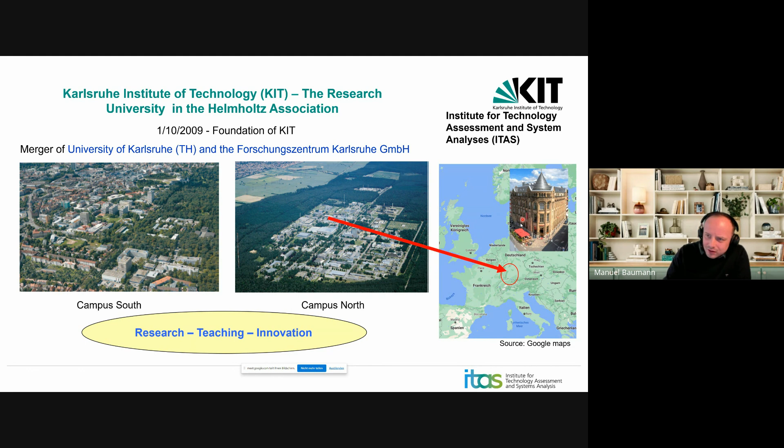I suppose not everybody knows where Karlsruhe is. So here you have Germany, and it's located in the very southwest of Germany. And this is our institute, the ITAS, in the center. So the KIT has several topics where they work on. The ones in bold are those which are the most relevant ones for us, at least in our group: climate and environment, energy, materials, mobility systems, humans, and technology.

Just to give you some numbers from 2022, KIT has about 9,700 employees, of which I would say about half are really researchers, and the rest is technicians and everything you need to keep research alive in an operative way. We have about 21,000 students, about 400 professors, and a budget of 970 million euros.

So let's jump into ITAS. We are part of KIT. Here you see the team in the center, and the building in the back is our institute. It's an old bank building in the center of Karlsruhe.

So also here, to give you a brief overview, we have a budget of about 9 million euros per year, with a third-party funding ratio of about 50%, and 37 projects ongoing. The employee number is not correct anymore—we have about, I would say, 150 employees in our institute at the moment, with about 30 PhDs. And we have researchers from all around the globe.

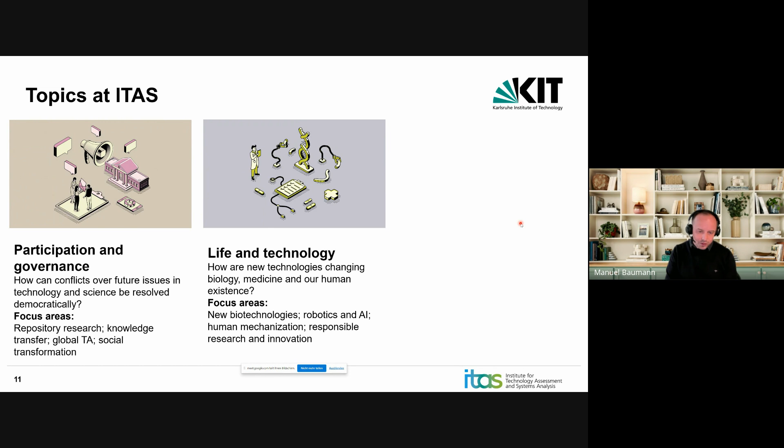And finally, we have visions and ethics. How do expectations of the future and ethical considerations shape science, technology, and politics? Here we have projects on vision assessment, global ethics, and technology and innovation.

So who are the ITAS addressees? Because we said that we try to provide knowledge for action. It's, for example, the German Bundestag, that's the parliament in Germany, where we have the Office of Technology Assessment at the German Bundestag, the so-called TAB.

Then we provide action knowledge to the European Parliament, the federal ministries that we have in Germany, the European Commission via third-party funding, other federal authorities which we try to consult, and state ministries of Baden-Württemberg.

That is the state within Germany where we're located. Then, of course, we have cooperations with companies and other associations, and we also make use of the media and the public, where we interlink with the broader citizenship.

So at ITAS, we have local activities, national activities, as you see here, and then international projects where we link to other colleagues all around the globe. And as I have mentioned before, we have the Office of Technology Assessment at the German Bundestag - this is a unique link to policy making.

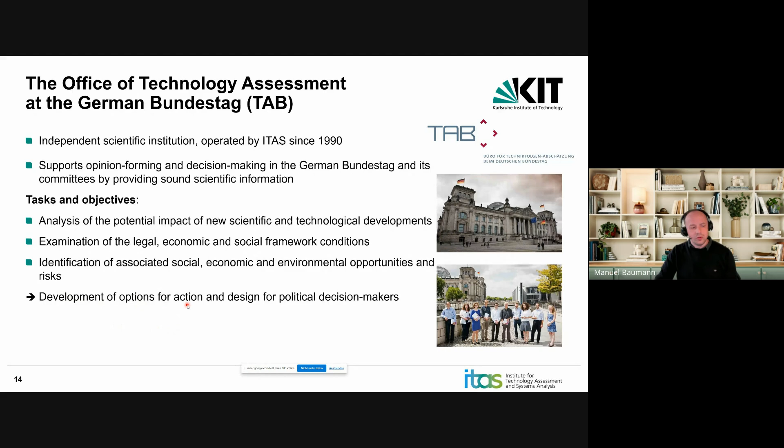The tasks and objectives are the analysis of the potential impact of new technologies, examination of legal, economic, and social framework conditions, and the identification of opportunities within these different dimensions. This shall serve as a base to carry out actions for political decision makers.

Here you see an overview. What are the tasks? Being a radar for new hot topics in technology development, showing the consequences, providing orientation, communicating science, stimulating a dialogue, and of course a networking aspect. You can just visit the website.

There are a lot of freely downloadable reports. You can see it's really very different, coming from genome editing, new space, etc. There are plenty of topics that are covered.

But now let's deep dive. What does research at ITAS look like? Here I will give you, in a nutshell, an overview on technology assessment and system analysis.

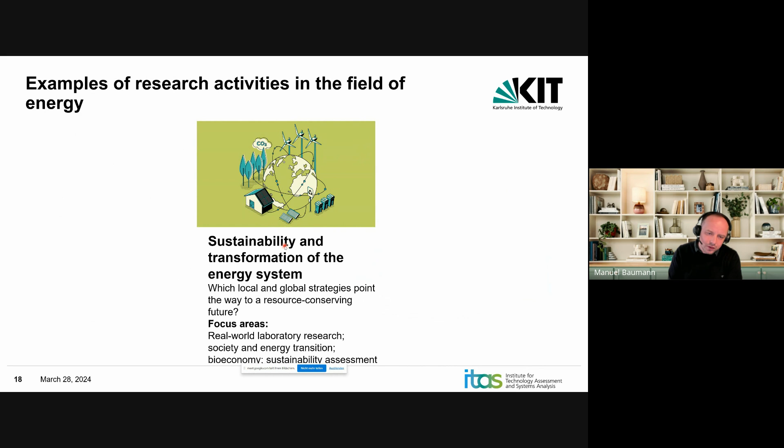As I've shown before, this is one of the areas we cover: sustainability and transformation of the energy system. Here we have several research groups, such as philosophy of technology, research for sustainable energy technologies, etc.

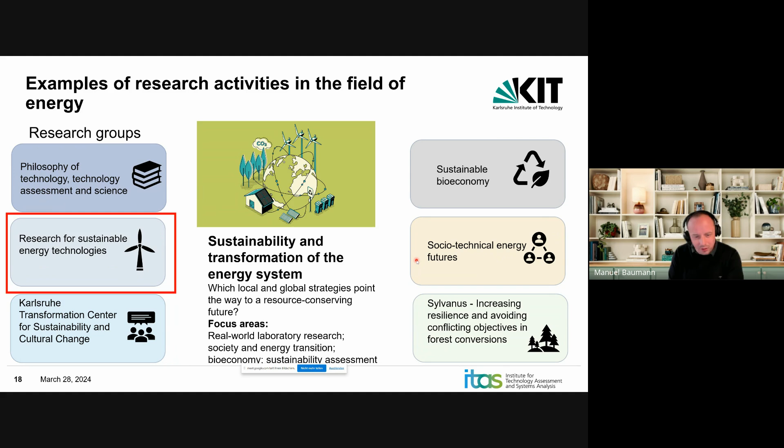I will primarily focus on the work conducted in the group RESET, Research for Sustainable Energy Technologies, because time is too short to provide you an overview of this multifaceted work being carried out at ITAS. So what is RESET?

Research for Sustainable Energy Technologies - this is the group. We are about 14 people, and what we do is conduct sustainability assessments on emerging technologies to support decision making.

Here we work with these fields. We do environmental assessments, life cycle assessments. We look at the economic dimension where we conduct methods like life cycle costing. Then we look at society where we have studies on technological acceptance, and we try to involve stakeholders as far as possible.

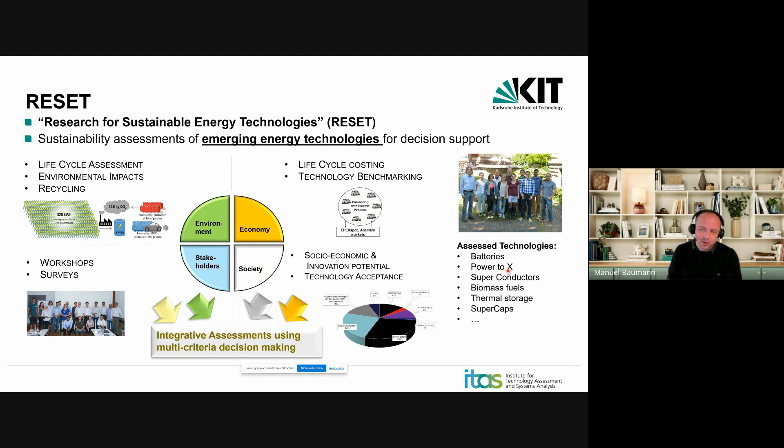Some technologies that we assess are batteries, power to X, biomass fuels, but today we're mainly going to speak about batteries. Having said that, why do we look at sustainability when it comes to batteries?

Of course, all of you know that we have issues: climate change, planetary limits, and for example the Sustainable Development Goals, which we try to fulfill.

There's some regulatory pressure for batteries and policy making in general in Europe, based on the European Green Deal. Then we have other developments like sustainable finance and taxonomy regulation. When it comes to batteries, we have an EU battery directive which really regulates, for example, the carbon footprint of batteries.

And it's always like the same question. We work in this field and try to improve our state of living, and there are always those that criticize that. But at the end, it's important to consider these topics.

In our assessments, we try to follow different concepts. For example, we have the integrative concept of sustainable development, which was developed here over 20 years at our institute. We try to follow the Sustainable Development Goals, and mainly due to operationalization issues, we use the triple bottom line model of sustainability.

As I said, we are looking at emerging technology. But what is emerging technology? There are several definitions of that. I will use one with this very nice definition that a PhD of us found, Merve Erakca.

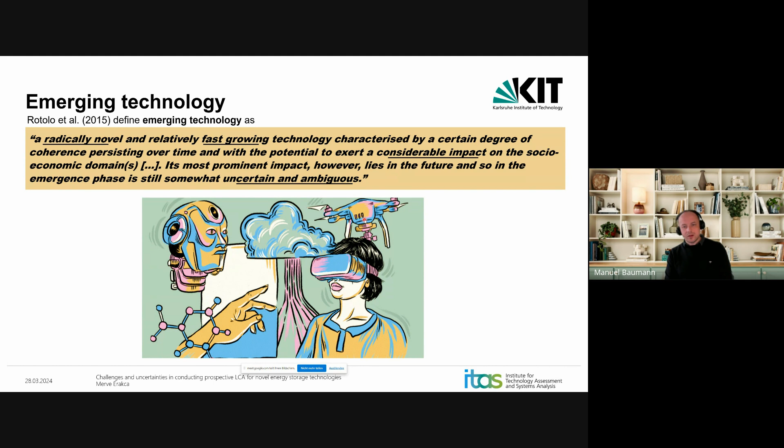Emerging technology can be defined as a radically novel and relatively fast-growing technology characterized by a certain degree of coherence, persisting over time, and with the potential to exert a considerable impact on the socioeconomic domains. Its most prominent impact, however, lies in the future, and so in the emergence phase is still somewhat uncertain and ambiguous.

From this result two questions for the sustainability assessment. The first one is to find the right shape targets. So if we want to have a sustainable technology, how do we have to shape the technology? Do we have to optimize it toward environmental, economic, or social dimensions, and how to characterize and quantify these?

And of course, to steer the development of emerging technology and to improve the sustainability before technology entrenchment limits the potential for intervention. I will show what that means in a later slide.

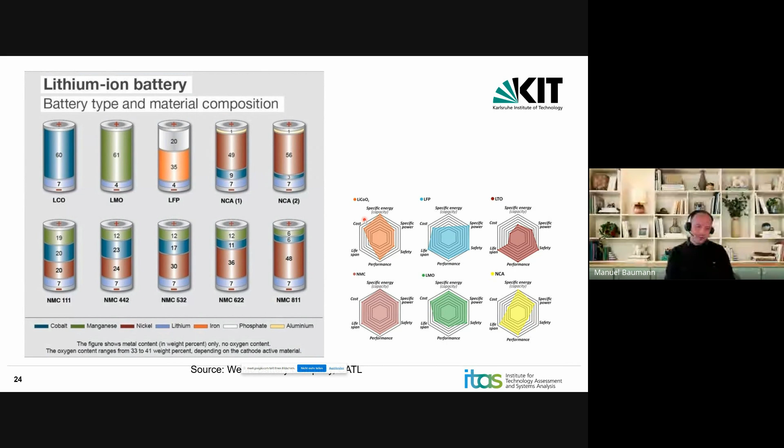So emerging technologies are for sure batteries, and in particular lithium-ion batteries. All of you know lithium-ion batteries. There are several chemistries available, and there are always new announcements.

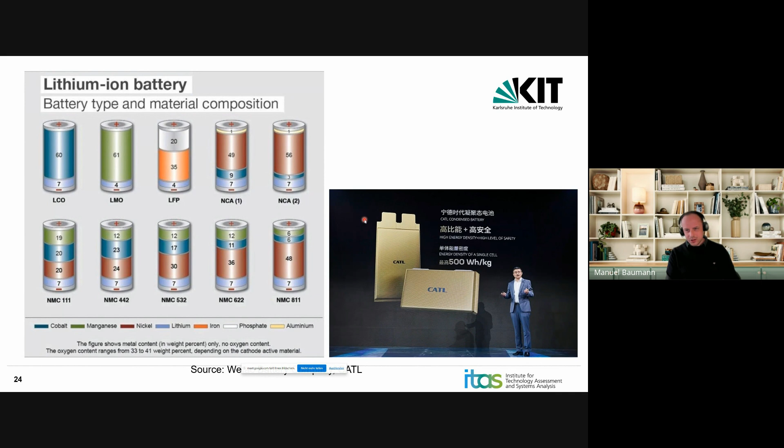So just like at the end of last year, CATL announced that they have a new battery with a very high energy density. The lithium-ion battery is a really disruptive and emerging technology, or was really disruptive, and is still emerging.

These issues are related to sustainability. You have doubts about the use of vulnerable raw materials, like you've all heard, for example cobalt, nickel, lithium. The production cost and life cycle costs are still too high. There are environmental and social impacts of production. The technological performance needs improvement, recycling issues, safety issues, and you can name other aspects.

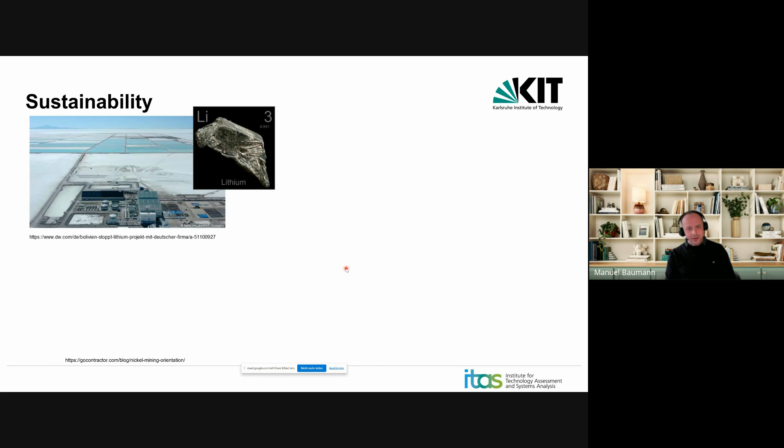But for sustainability, it's mainly due to the extraction and purification of lithium and cobalt, depending on the chemistry, or here of nickel, just to give you some examples.

So the topics for sustainability assessment along the life cycle of batteries, as you see here - there's an article available on this - is really starting from raw materials, the design of the battery, the production of the same, the use phase, potentially a second or third use phase of the battery, and recycling at the end.

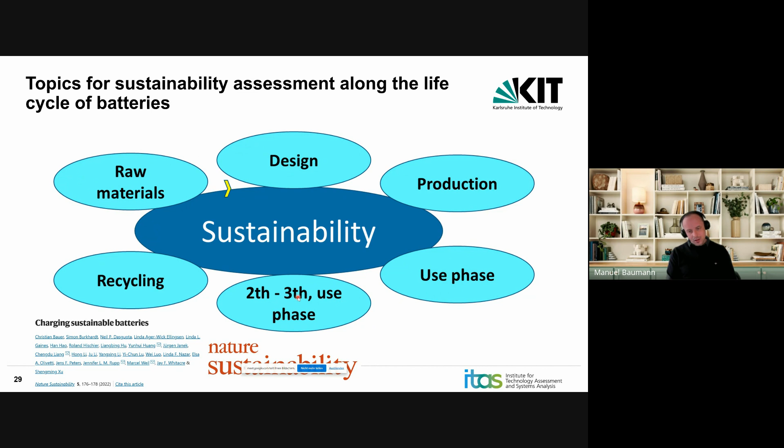And if we are doing these assessments, it's always important to understand that there are important factors for energy storage, which is energy density, power density, efficiency, safety, cost, sustainability, and many more.

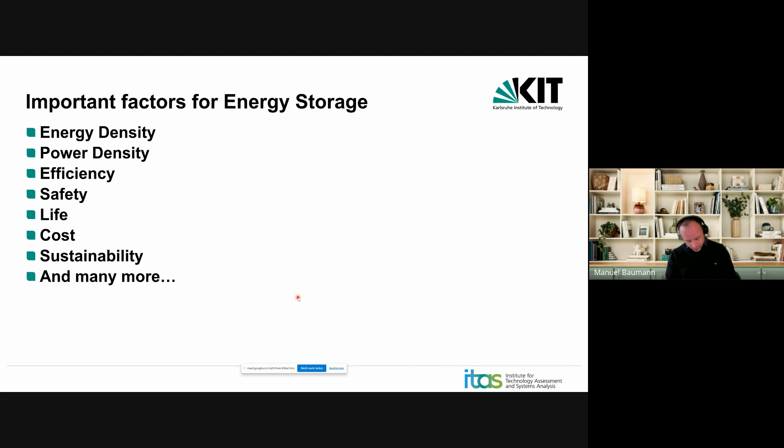But what we have learned, or it's a fact, is that there is no perfect energy storage solution. There is no perfect technological solution at all. You will always have some trade-off that is necessary. For example, if you want to have a high capacity battery, it will not have a high durability. Or if you want to have high environmental standards, the cost cannot be low, depending on how you include them.

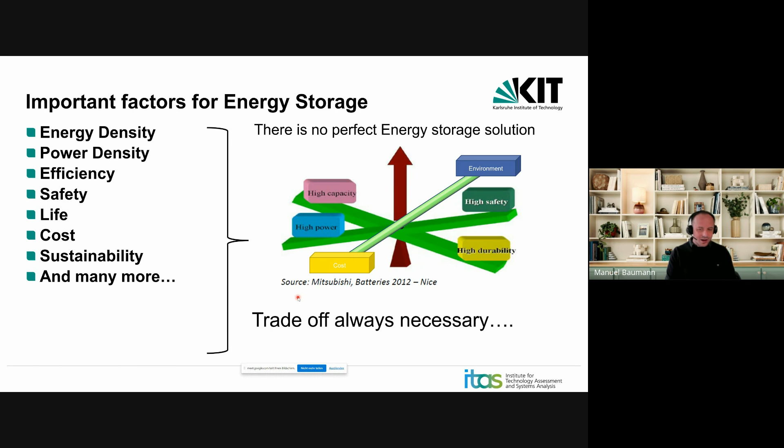A major problem in the development of sustainable technologies is a time, power, and control dilemma, the so-called Collingridge dilemma. If we look at the different technology readiness levels, maybe some of you are familiar with them, it starts with 1 and goes to 9. 1 means a technology is being investigated regarding its basic principles, and you see, for example, in TRL4 you have an experimental pilot, and 9 is when you really have a successful working system that can be introduced into markets.

So over time, the potential for sustainable design goes down. Here we have a lot of degree of freedom to design our technology, and the cost for adjustments is low. But over time, the potential for sustainable design goes down and the cost for adjustments goes up. Why?

Because we have here a kind of entrenchment. So when we have a full proven industrial manufacturing line, it will be very costly to adjust it to become a more sustainable production process. So we have really a time problem here and a growing entrenchment in the development of technologies.

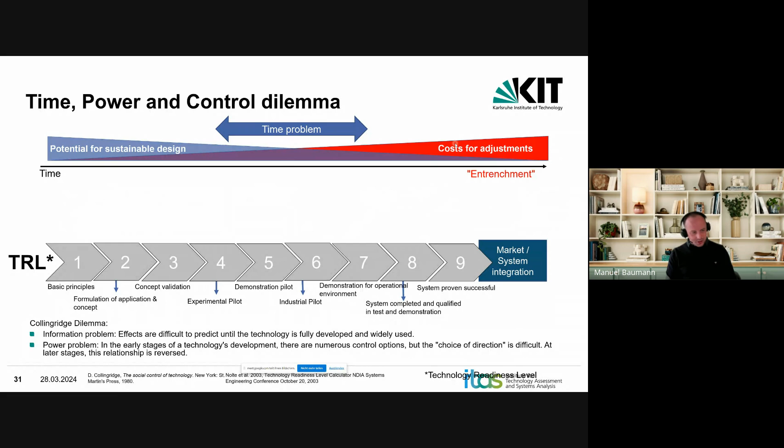And this leads to a Collingridge dilemma, which is, on the first hand, you have an information problem because the effects are difficult to predict until the technology is fully developed and widely used. That means at the beginning of the development phase, we only have a little information about the technology. This becomes more over time, of course, because we can collect data, we see how it's operated, etc.

At the same time, we have a power problem. The degree of freedom is being minimized over time. That means here, when we could do the most, we don't have the data to do that because we do not know what the impacts are and we do not know how the performance of the technology looks like. So you have two trends that are not running in the same way.

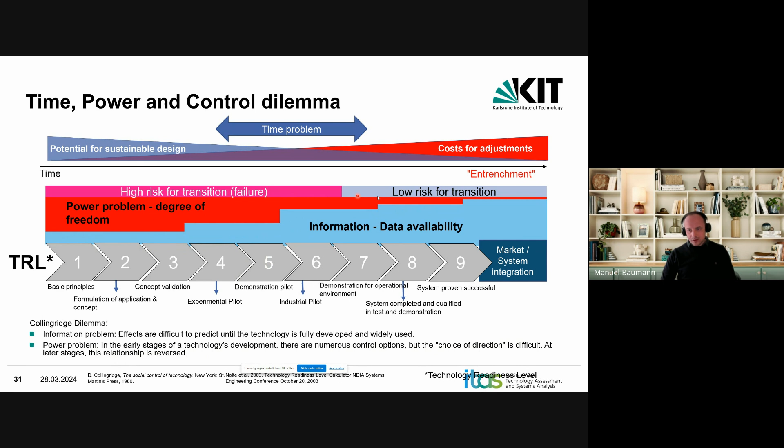So here, the power problem: in early stages of a technology's development, there are numerous control options, but the choice of direction is difficult. At later stages, this relationship is reversed. Of course, you have here a high risk of failure of the technology, and here not a low risk, but a lower risk for transition into markets.

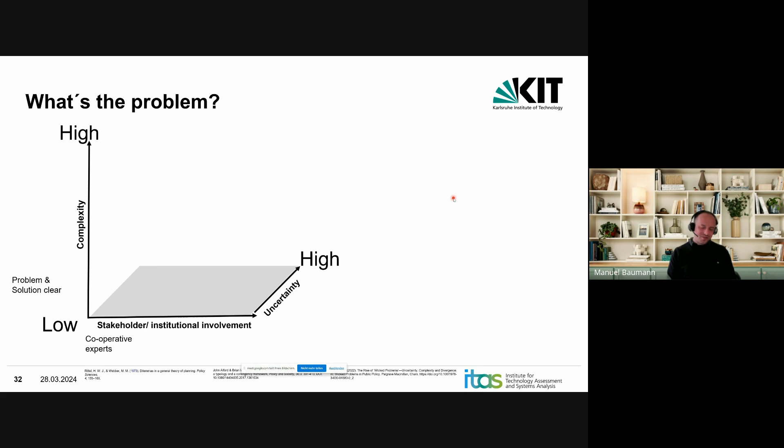And if it comes to sustainability, it becomes complex. You can use this, I would say, rather engineering thinking like structuring of problems. So if we have, let's say, only a component that we're looking at, developing a new cathode material for a battery, we might have a so-called tame problem. The problem and the solution are clear, and we only have a limited amount of stakeholders that we have to involve, like technology developers, chemists, etc.

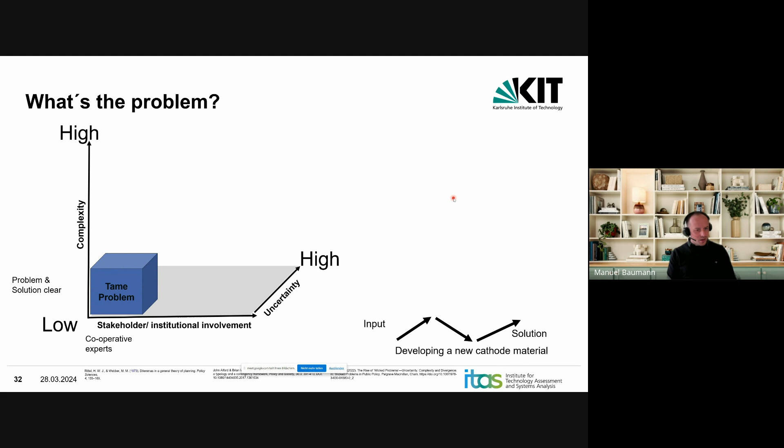But if it becomes more complex, like we want to build a new sustainable storage unit, it becomes more complex because we have more factors that we have to consider, more components, and we might have more experts that we have to involve, each with its own expertise. Then, of course, uncertainty is also increased here.

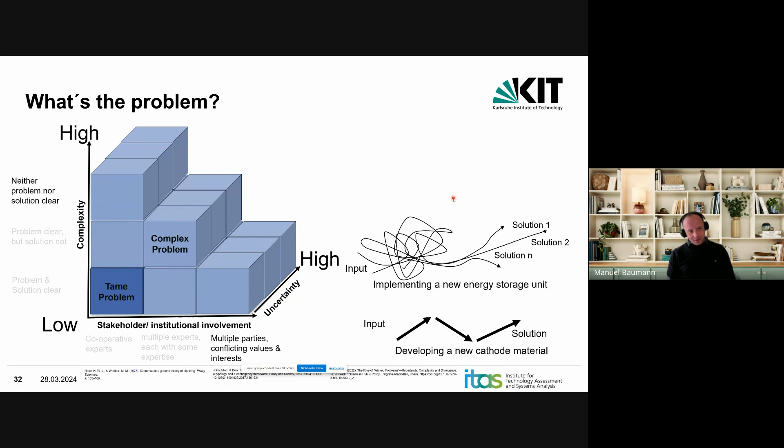Let's say the highest degree is when it becomes a wicked problem. What is a wicked problem? It's when neither the problem nor the solution is clear.

By looking at a complex problem like the energy transition, we identify new problems, and we have to find new solution paths. So it's always an iterative process, a never-ending process. We always have to reconfigure our way of tackling the problem and understanding it. There is no best or worst solution, so we always have to keep on iterating.

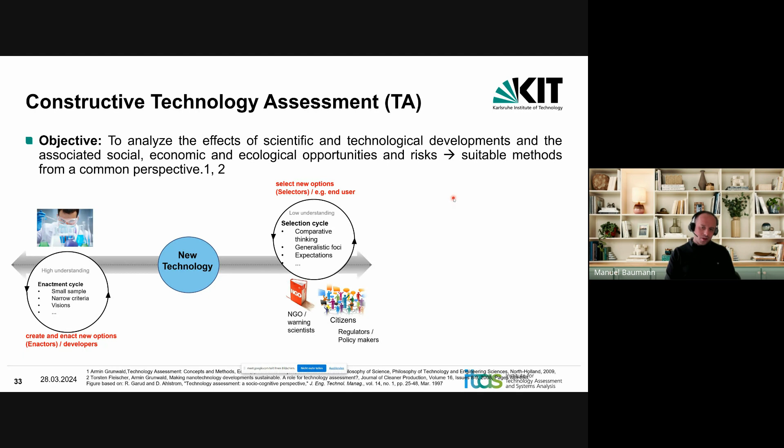On the other hand, we have so-called selectors. They are, for example, end users, NGOs, whatever you want, and they have a rather comparative thinking, a generalistic focus. We try to put them into dialogue, to serve as a broker, you can say so, and we try to steer technological development and give some space for interaction.

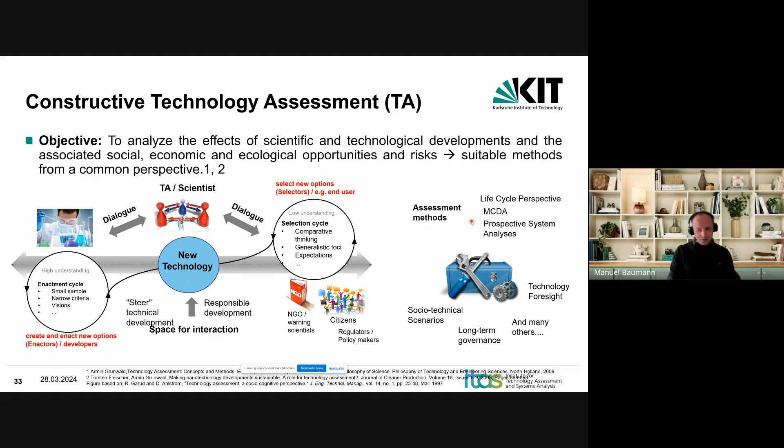And to do so, we have different assessment methods like life cycle assessment, multi-criteria decision-making, technology foresight, socio-technical scenarios, and so on and so forth. Within our group, we mainly focus on sustainability assessment methods.

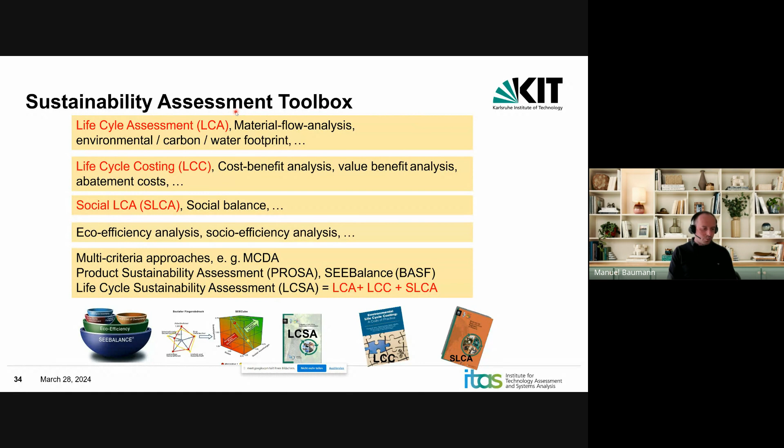One of the most important ones is life cycle assessment. Then we have life cycle costing and social life cycle assessment and other ones which I will not go into detail. But I think here life cycle assessment, material flow analysis, environmental, carbon, and water footprint are different indicators that can be used, and are the most important ones.

This way of thinking, life cycle based sustainability assessment, is important because any environmental, economic, or social assessment method has to take into account the entire full life cycle of a product, just to be able to identify potential hotspots that might occur during one of the different life cycle steps. So it starts really with natural resources, extraction of raw materials, production, use and maintenance, disposal and recycling.

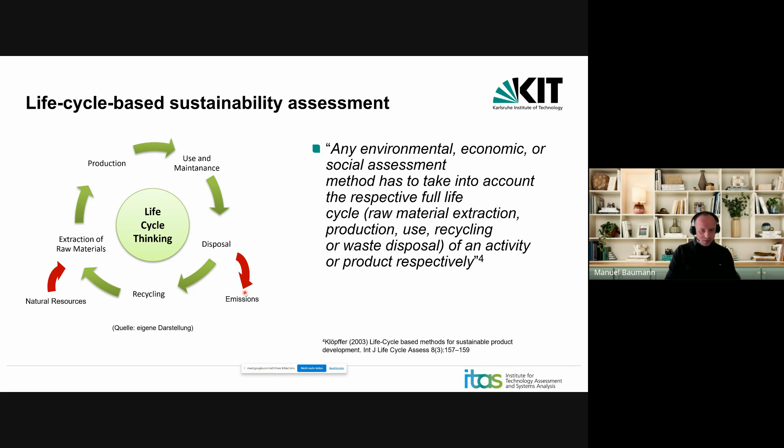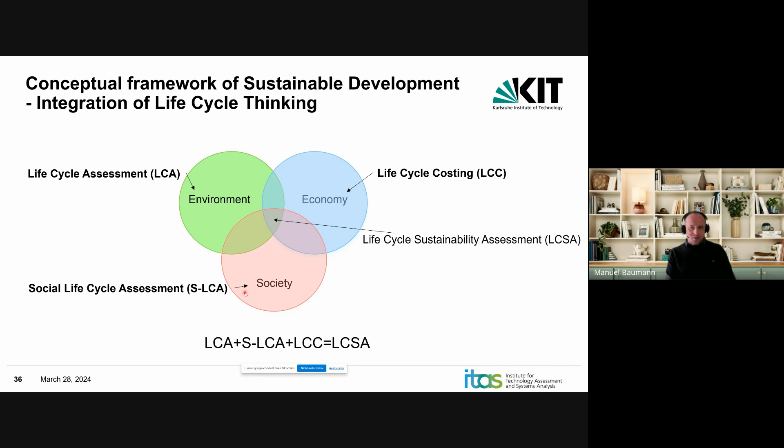And here you have different frameworks where you can integrate the different dimensions, environment, economy, and society, and conduct something like a life cycle sustainability assessment, where you combine these different life cycle oriented methods: LCA, LCC, or SLCA. Just to give you a brief overview, these methods share more or less a common approach.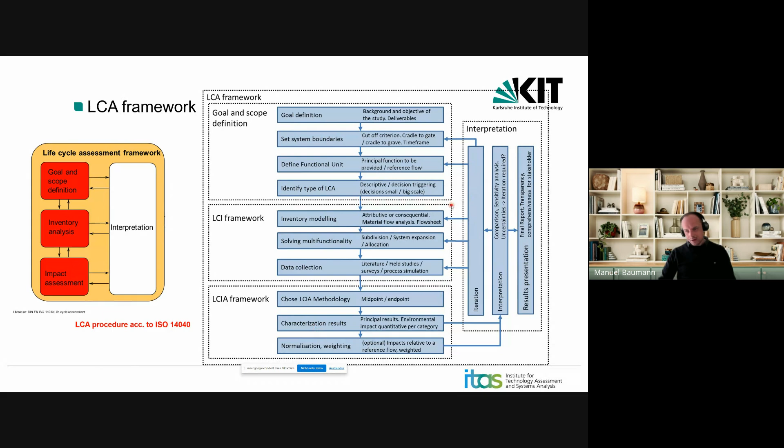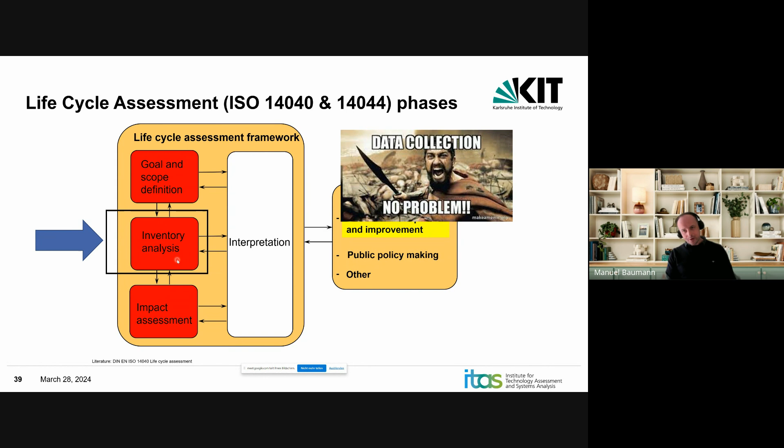One major step is the inventory analysis. This is the part where you collect data. It's the most crucial step for all the methods that I have shown you before, because we always start with data collection, no problem, but at the end, there is no data. It's a classic. Every PhD that starts within our group struggles to collect the data that he needs.

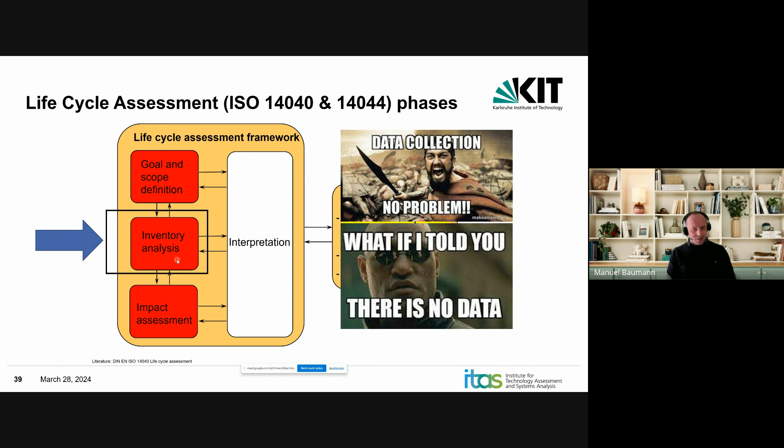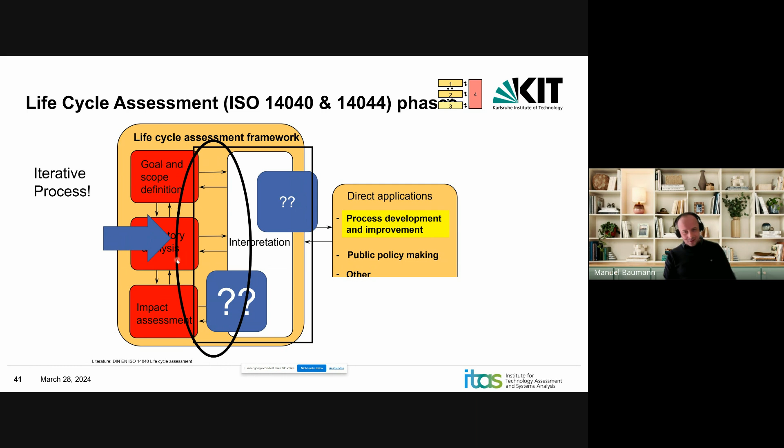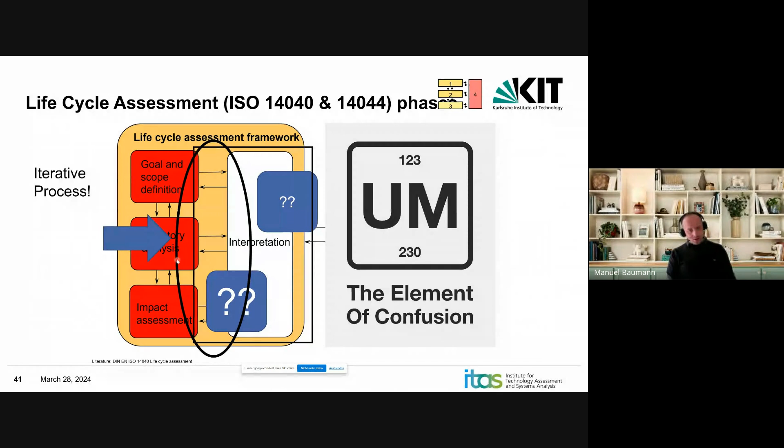And then we come to the interpretation phase, which is, I would say, the most difficult one — well, all steps are difficult, but it's an iterative process. This is not sequential, what I have shown you. Everything is iterative because we have to understand our results and the impact assessment, go back maybe to the inventory analysis and maybe also reformulate our goal and scope definition. And here in the interpretation, classically, this element of confusion occurs. So it's important just to get into the doing with an assessment to understand the results, to reshape the data, and so on.

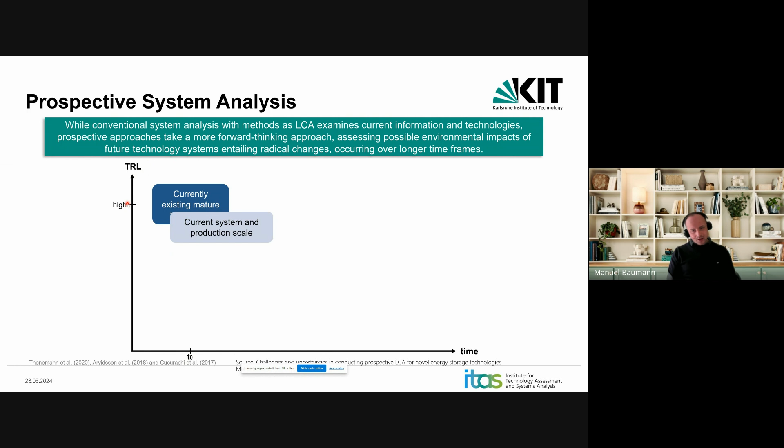And if we look into emerging technologies, it's quite difficult because it is not like looking at a standardized existing project. So you have, for example, at a high TRL, an existing mature technology and a current system and production scale. And if we look at emerging technology, we have a low TRL, so you just cannot scale it up at the same time. Rather, you have to think in a scenario: how will this technology be implemented, how will it be produced — and of course not at the low TRL, at the high TRL, yes?

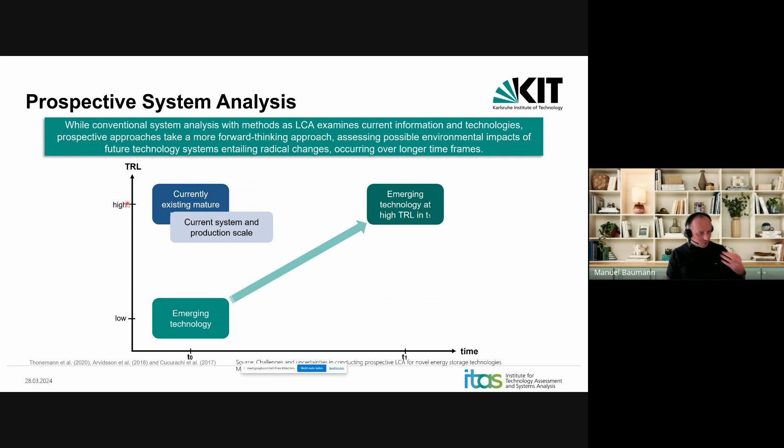And this is quite challenging because this new technology might entail radical changes that might not occur now, but in, let's say, 10 years. And from this, different challenges occur.

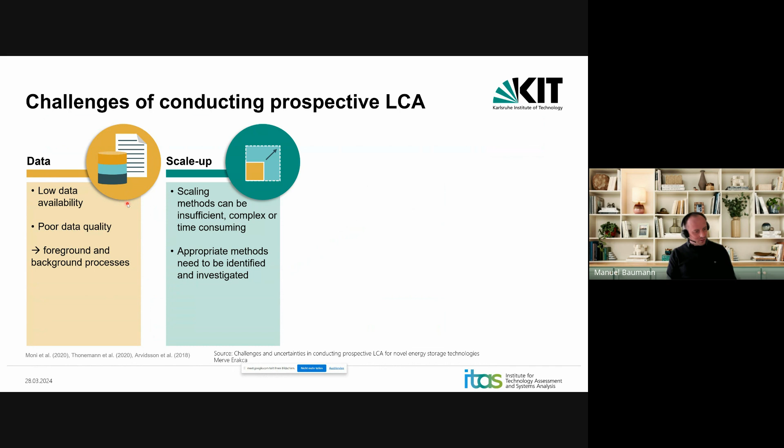Data-wise, we have, as I said before, low data availability, poor data quality for different foreground and background processes. We have to conduct a scale-up — this can be very difficult, there are several methods available. Of course, we have uncertainty which we have to deal with: model uncertainty, scenario uncertainty. Communication of the results with stakeholders has to be carried out very carefully here in order not to provide a wrong picture, and comparability.

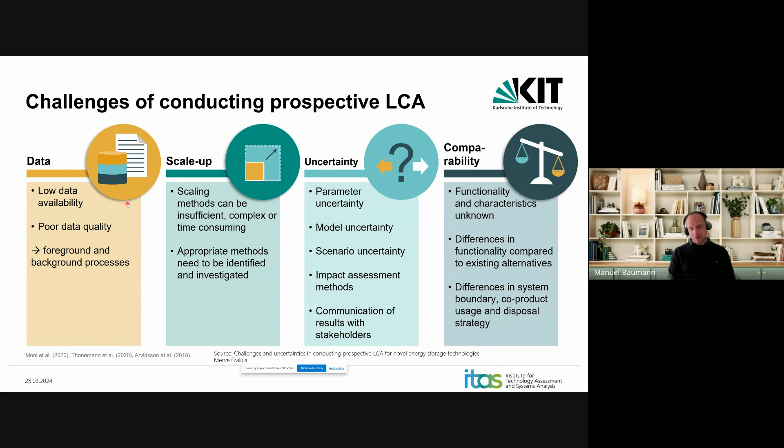So we have to consider the functionality and characteristics which we might not know in the future, for example. What are the differences in functionality compared to existing alternatives? What are the differences in system boundaries? So these are just some aspects that have to be considered.

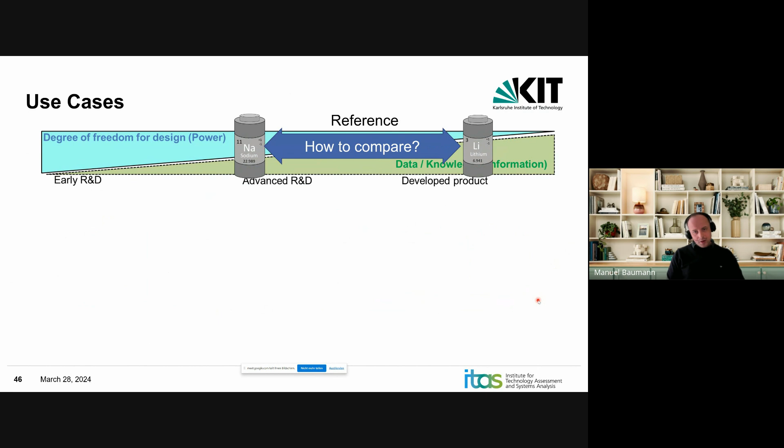If we look at the different steps to produce a cell, coming from material level to end of life: we have a material level where we have active materials, we manufacture electrodes with binders, collectors, conductive additives, then we build a cell, then we build a module, then we build a pack or a rack, then there is an application, and at the end of life.

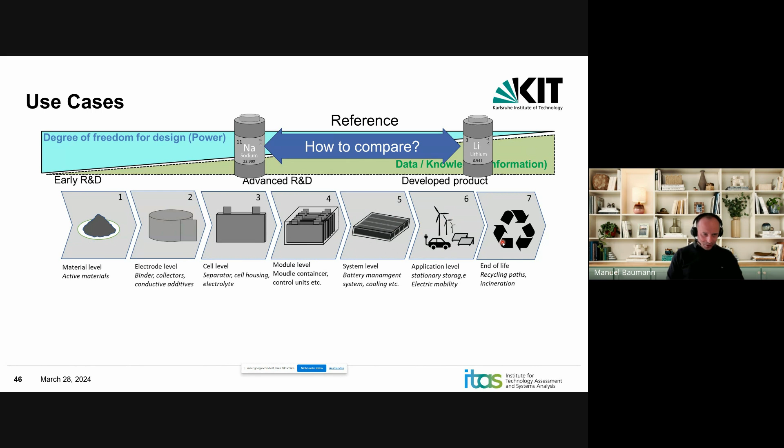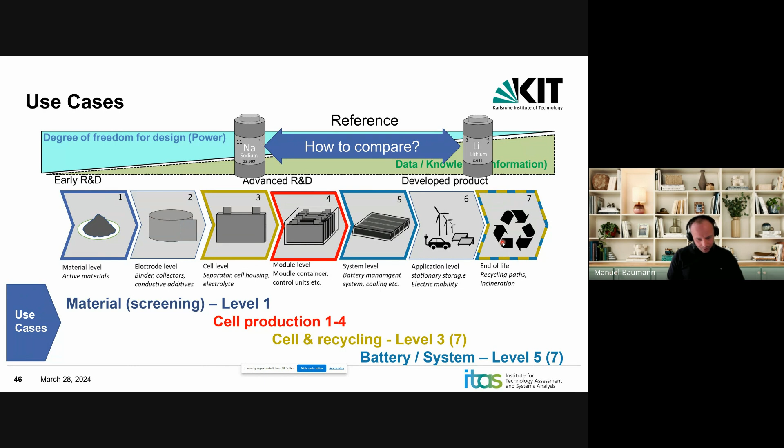In the following, I will show you some use cases — not all of them, just two — to provide you a first rough idea of how we try to tackle these uncertainty issues and to provide feedback to our peer group, which depends then also always on the project context.

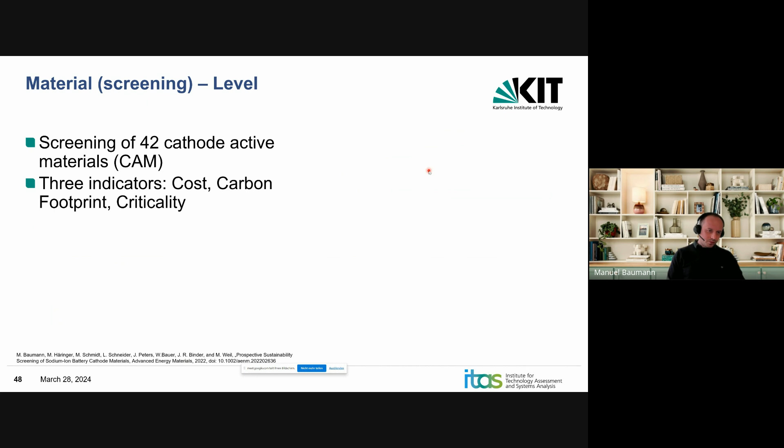The first case is a material screening where we conducted a sustainability screening of sodium-ion battery cathode materials. The target groups were technology developers, and we have a very high uncertainty here because we are dealing with a very low TRL. There is an article available for this, you can see it here and go into that if you want. We focus here only on the material level — the cell level is not considered. So how did we do that? We screened 42 cathode active materials with 3 simple indicators: cost, carbon footprint, criticality. And we had to use theoretical data, literature, and electrochemical calculations. And here's the framework.

I have to tell you, we started very naive with this task. Like 3 years ago, within a project, we said let's do a screening of activities where you're developing different cathode materials at KIT, like the guys from the lab. We thought it would be a very fast task. It took us 1.5 years to come up with an assessment, and we had to discuss a lot on the different criteria because we had such high uncertainty.

We had to use very simple indicators that are useful at this very initial stage of development of a sodium-ion battery. So we separated the cathode materials into oxidic and polyanionic materials and benchmarked them against the corresponding state-of-the-art lithium-ion battery systems. NMC 622 is nickel, manganese, cobalt - one generation before. I think now it's 811 mainly being applied, which is used in electric vehicles, and the lithium iron phosphate battery for this other type.

As you see here, we compared 8 lithium cathode types with 42 sodium-ion cathode types. We calculated the energy densities, looked at the raw materials, and then indicated in a kind of traffic light system the potential hotspots in the development.

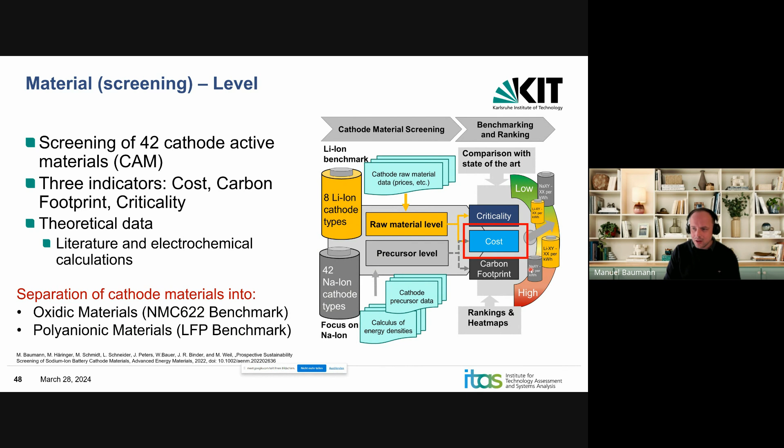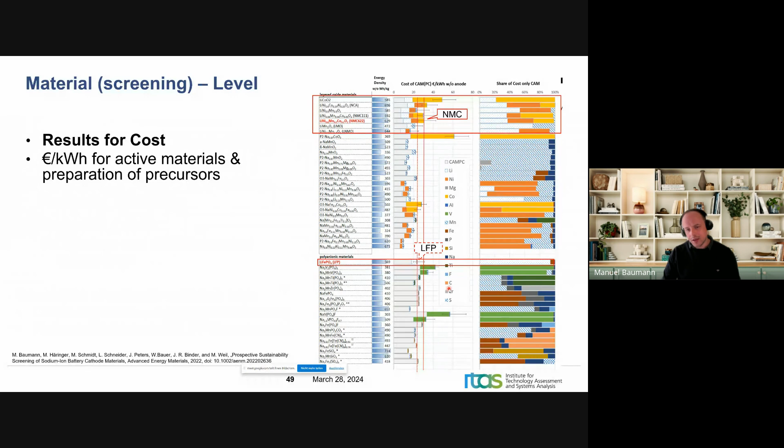Long story short, we saw that cobalt, nickel, and vanadium are key drivers for the cost. However, we saw that there is a surprisingly good correlation between the three indicators that I've shown you before, but there's a high uncertainty in the results here.

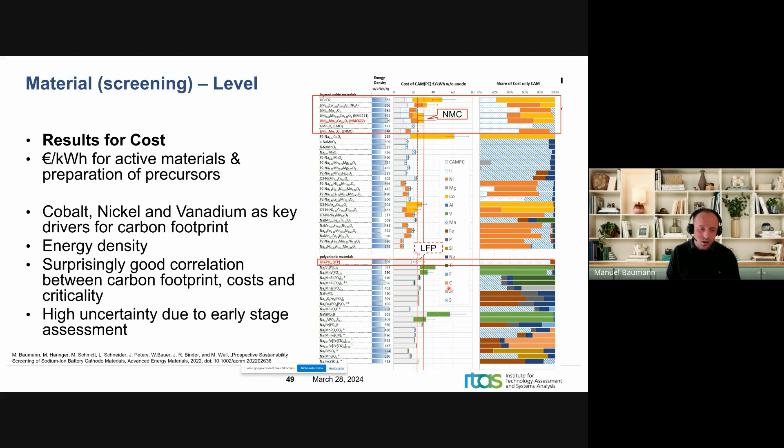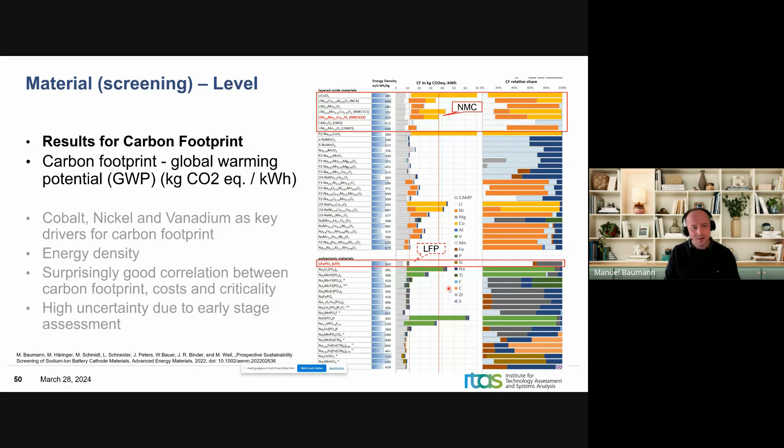The results for the carbon footprint are, I would say, comparable. The carbon footprint is the kilogram CO2 equivalents per kilowatt hour of cathode material produced. And also here we can see that again, cobalt, nickel, and vanadium are the key drivers for the carbon footprint, and again we have a very good correlation to the other indicators.

The criticality, though, is in particular out of a European perspective very important, because Europe doesn't have any substantial resources when it comes to batteries. We don't have lithium - we have lithium, but we're not mining it, at least not in the amounts that we would require.

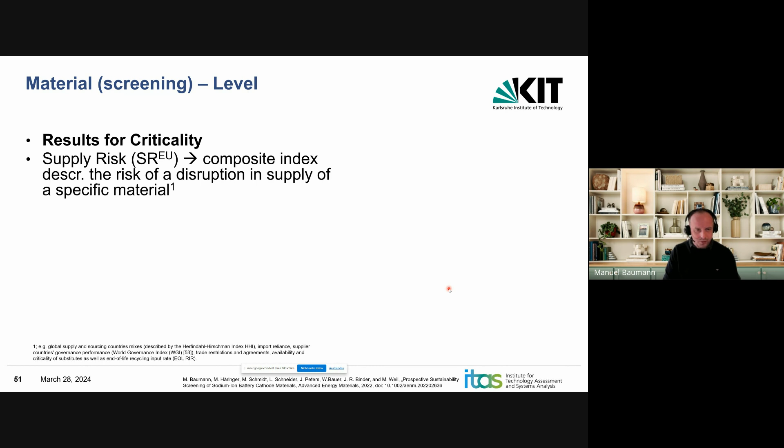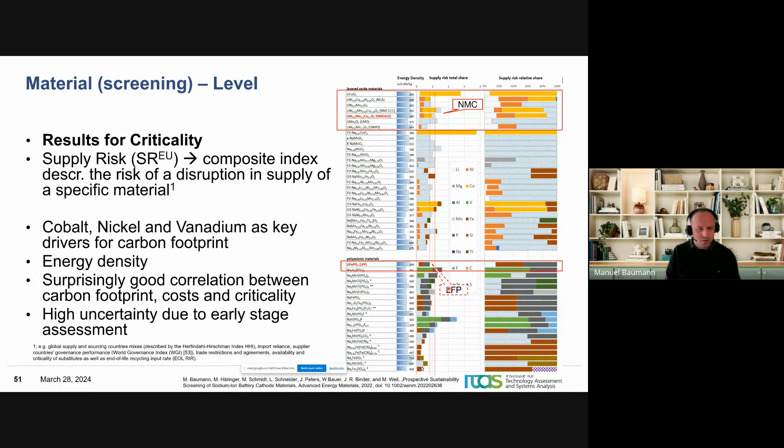That's why resource criticality is something very crucial in Europe, because we have to import most of the resources. There is an indicator called supply risk - a composite index which describes the risk of a disruption in the supply of a specific material, based on a certain scope, for example the US or the EU will have different supply risks. Here you see the evaluation of these different materials from the supply risk perspective - again, cobalt, nickel, and vanadium are the main problems for the supply risk.

Though this is very difficult, right? You have three different indicators, so what do you say then to the technology developers? Here we try to do a tentative ranking to provide them a priority list of chemistries that should be further investigated, and we came up with this ranking. We saw that there is a group of chemistries that provide good results, and we did some sensitivity analysis to check the robustness.

At the end, there's high uncertainty related to this, and we also did some extrapolation to the future, though I'm not showing that slide - how will the cost evolve, how might economies of scale impact the results, to provide a view into the future.

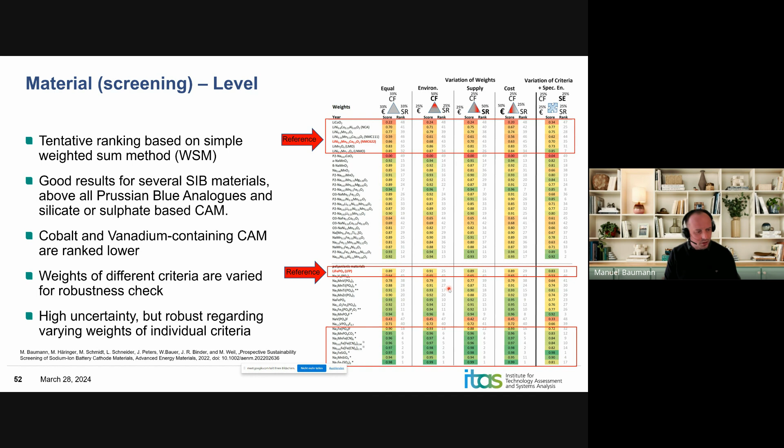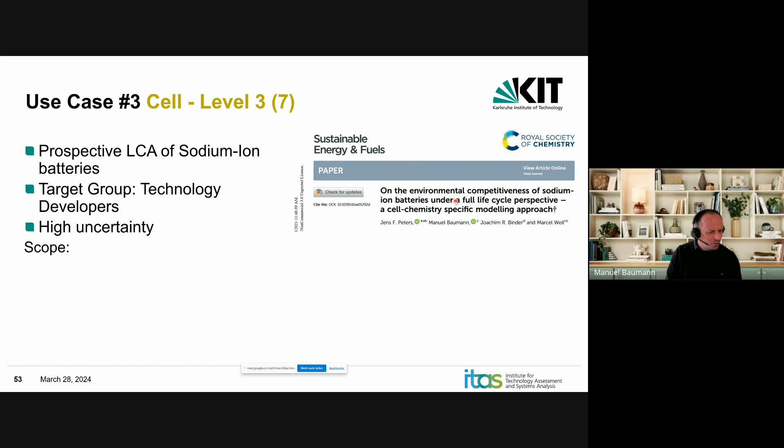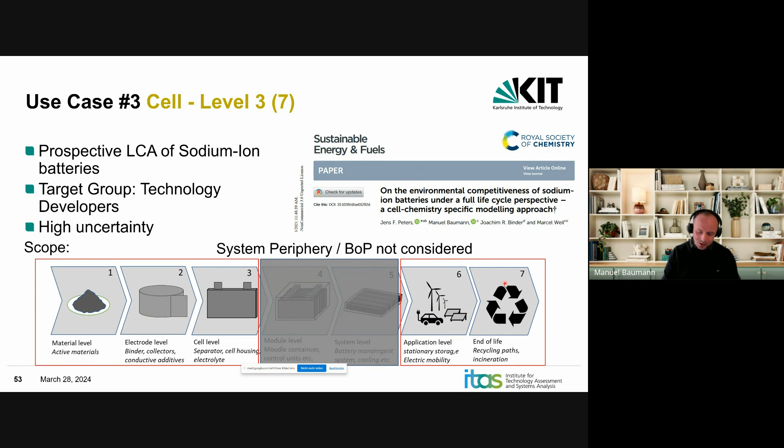Also here, the system boundary covered these steps: active materials, electrode level, cell level, and application level. What we did is conduct a life cycle assessment of sodium-ion battery cells, where we included manufacturing, use phase, and end-of-life phase. I will show you the impacts of this technology across, I think, 5 different alternatives related to their global warming potential and abiotic resource depletion potential.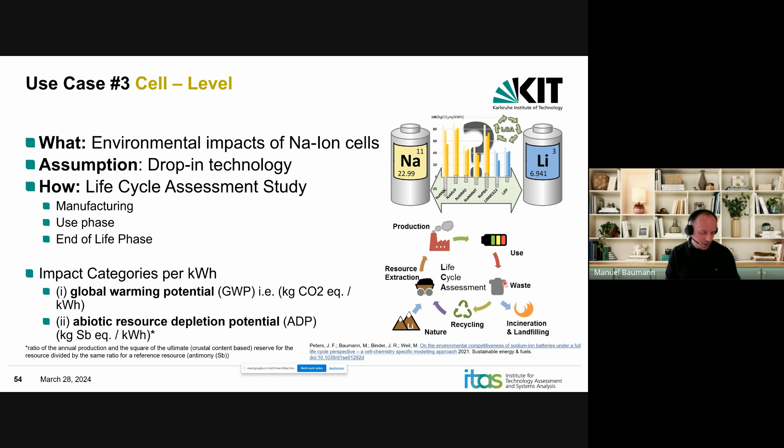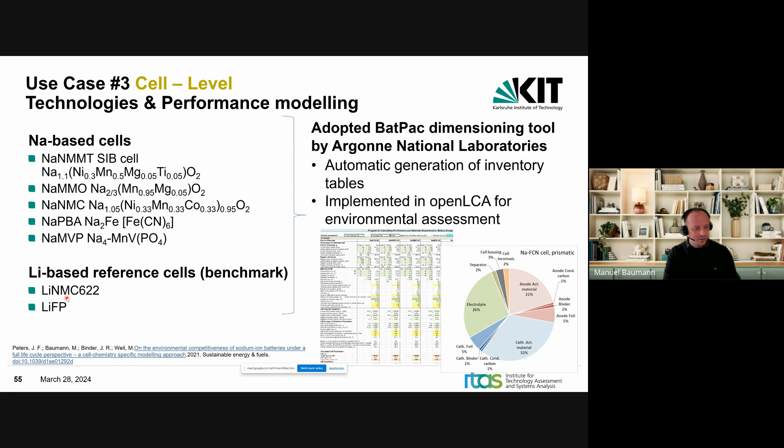The abiotic resource depletion potential is an indicator for how much metallic non-fossil resources are depleted when you manufacture systems. These are the sodium cells that were investigated, and here the reference cells. And here it started, there was no data available, so we had to build up our own model. A model is, of course, theoretical, but it's freely downloadable, so you can take a look at it if you want to.

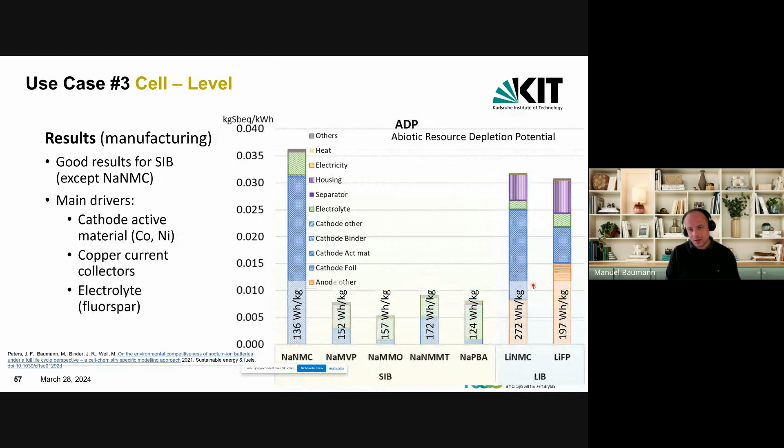Interesting here is when you go to another indicator, the abiotic resource depletion, the picture looks completely different. Here, sodium-ion batteries mostly outperform lithium-ion batteries completely. Same systems, different impact category, completely different results. So this is what I meant with the trade-offs before. If you have different indicators, you will have to go into interpretation and think about what you have to tell your peer group about what these results mean.

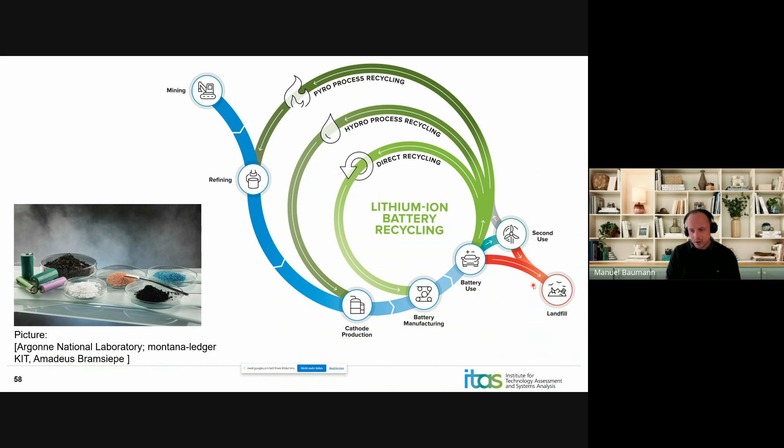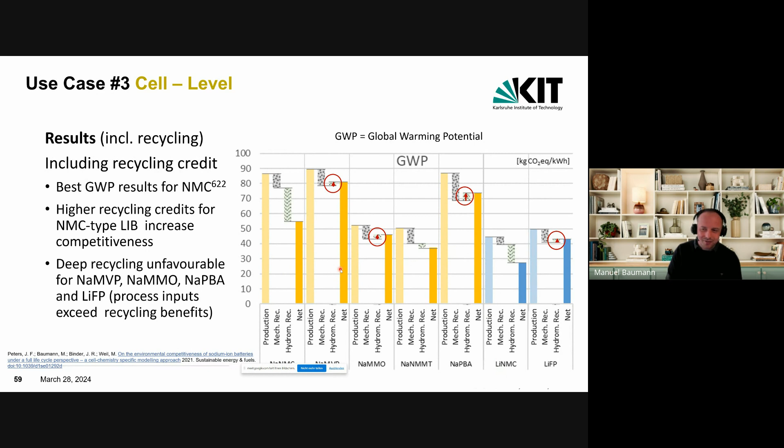So in the next step, we decided to look at the different recycling paths that are possible, because we'd be interested, if we recycle the cells appropriately with high-end recycling, what would happen? Recycling is always considered to be environmentally friendly, but here we saw for the global warming potential that no, for the sodium ion batteries, if we really go into highly advanced recycling, getting out every component of the cell, we have a higher carbon footprint in relation to simple recycling methods, in relation to this, let's say, bad lithium, nickel, manganese, cobalt battery, which then performs better. The sodium ion batteries showed to have a worse result here.

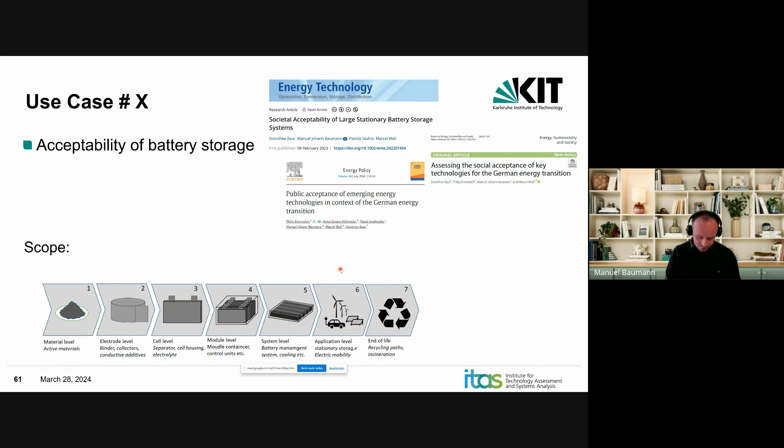Last use case, just to give you a different picture, we looked here at the acceptability of battery storage. There are different articles available here. And here we wanted to go beyond pure technology development and understand what are, for example, acceptability issues when it comes to the implementation of large battery storage facilities.

So what we did here, we made a survey because we saw that there are several studies available for technical, economic, and environmental factors, but social acceptability is a key condition for enabling a smooth rollout of storage technologies, in particular of large ones. So we carried out an online questionnaire to capture, in a qualitative way, the public opinions. And there's also this article which you can take a look at.

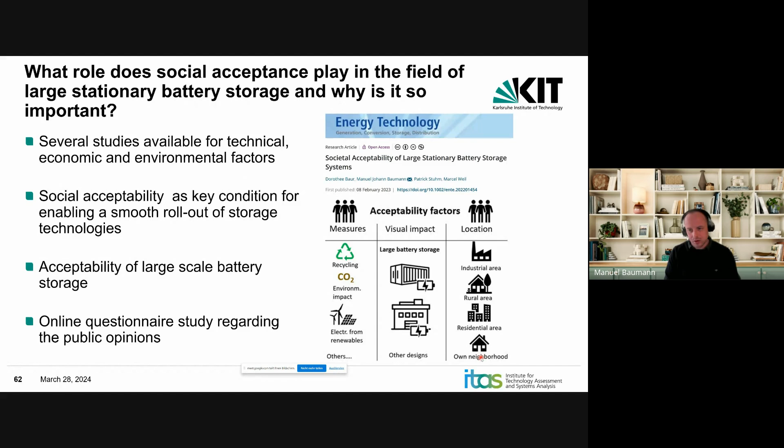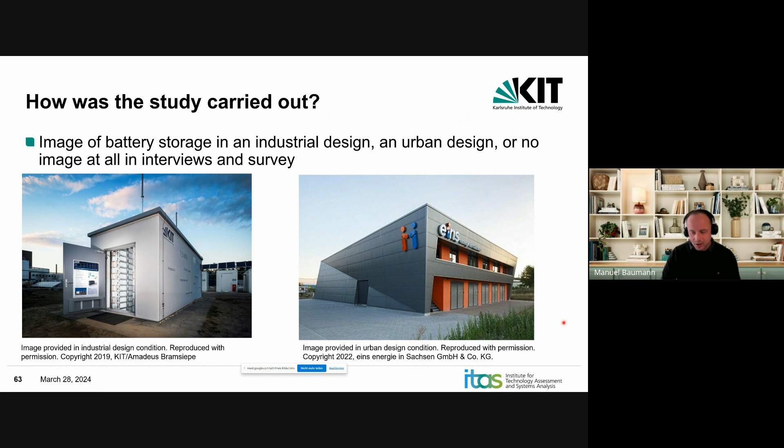And here you see we looked at the visual impact of the systems. How does this affect the acceptance, the location? If we would build it in a neighborhood, in a residential area or industrial area, what are the implications when it comes to acceptance? Here you see the two different images that we provided to our participants, and then they could fill out the survey depending on their impressions. So you have here this rather industrial design of a container, and here the integration of the storage system into a fancy building.

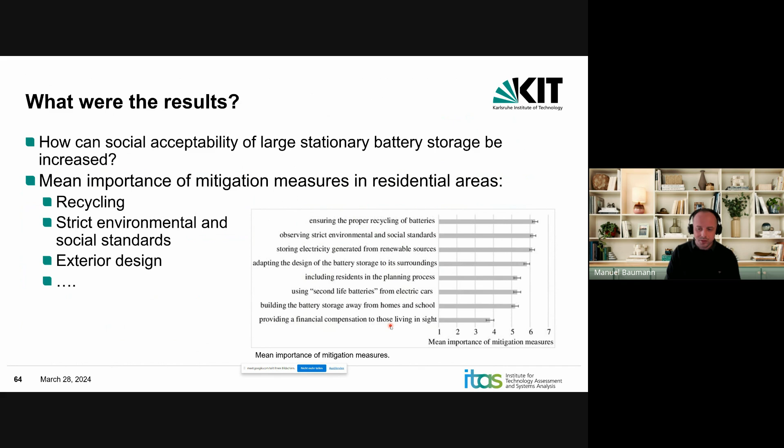And we saw here that ensuring proper recycling was perceived as very important, observing strict environmental and social standards. And then here the lowest one was providing a financial compensation to those living in sight, which was ranked the lowest. However, you can take a deep dive into the article if you want to.

To come to an end, what are the challenges regarding transferability also to other cell technologies or technologies in general? I showed you an assessment on a material level. The results that I showed you here are just valid for a certain material. They can be very different on a component or system level. There is also high uncertainty when we look at the manufacturing processes. It's very crucial to consider where it's produced, how it's produced, and also to consider transport routes here.

Then the performance - this is a very hard task because often we do not know the efficiency of the cell, how's the lifetime, etc. So here we have to work with, for example, parameterization, etc. Then, of course, recycling.

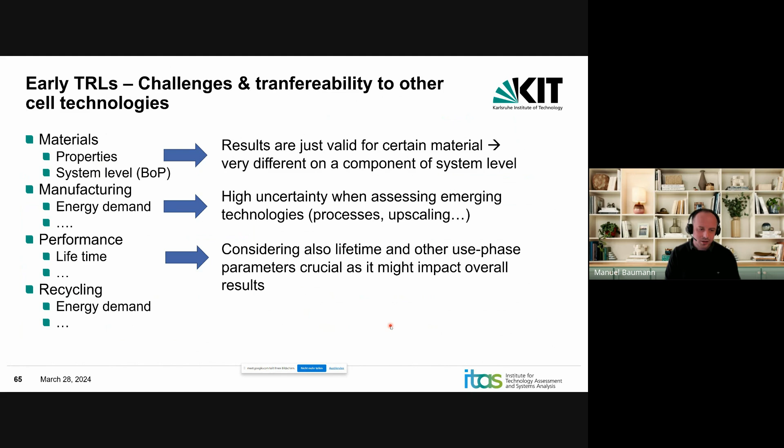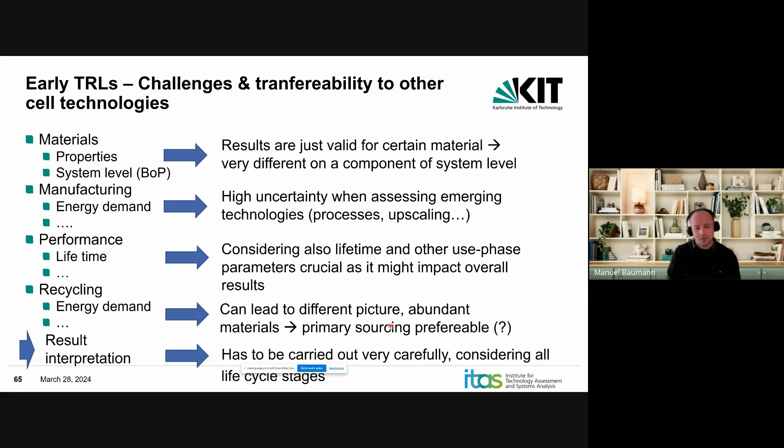We have to include that because it leads to a completely different picture. Sometimes, as you have seen, primary sourcing for abundant materials might be more efficient from an environmental perspective. The result interpretation always has to be carried out very carefully, and all relevant life cycle stages should be considered.

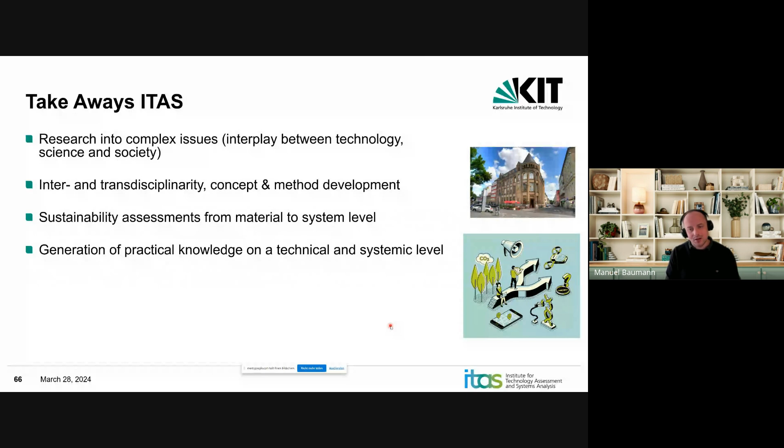Takeaways from ITAS, so you keep our institution in mind: we try to research complex issues, the interplay between technology, science, and society. We are inter- and transdisciplinary. We work on concept and method development. Sustainability assessments cover materials to system level, and we want to generate practical knowledge on a technical and systemic level. We have a broad orientation towards EU level, global level, federal and state level, and industry.

Here are further use cases that you can take a look at. I think I will send the presentation later on to you, Professor Kumar, so you can take a look at it. Thank you very much for your attention. I think I took 5 minutes too much, and I'm open for questions if there are any.

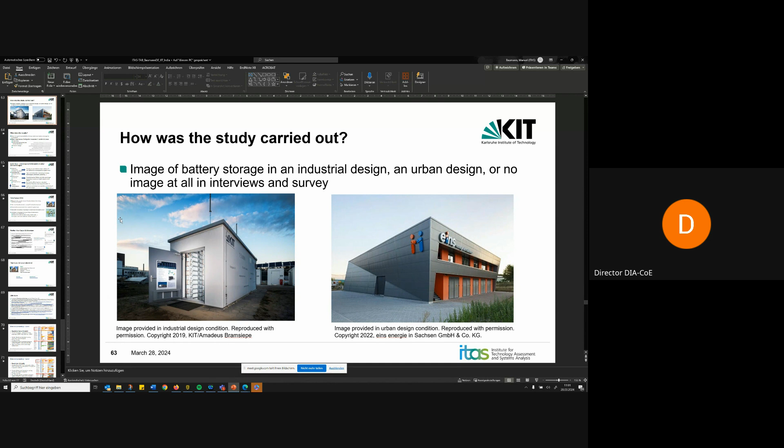Hi, Mr. Manuel. It's a very nice talk from you. I have one last question regarding the difference between - how can you differentiate between lead acid and lithium ion batteries?

Okay, the lead acid battery and the lithium ion battery - the lead acid battery is the oldest, the mother of all batteries, with a long history of development. The energy density is the biggest difference, I would say. For a lead acid battery, depending on the type, you have about 30 to 50 watt hours per kilogram, versus a lithium ion battery which has 250, 260 watt hours per kilogram. So the energy carried per mass unit is very different for those two systems.

On the other hand, the lead acid battery is a very simple system in relation to a lithium ion battery - you can easily dismantle it, you can easily build it. A problem with lead acid batteries is that you have lead in it, which is highly toxic. That's why in Europe it has to be recycled, due to the high environmental impact, and actually an advantage because recycling rates of lead acid batteries here are up to 98%. This avoids any lead going into the environment.